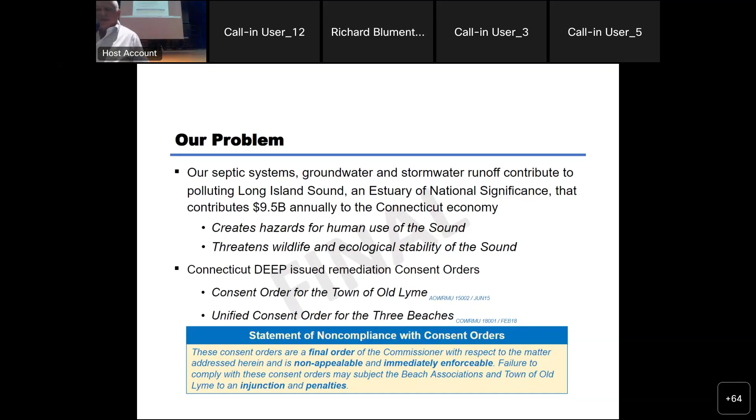Our shared objectives are to construct a solution that addresses those problems, that remediates the pollution impact to the sound and to our local properties, and to be in compliance with the consent order.

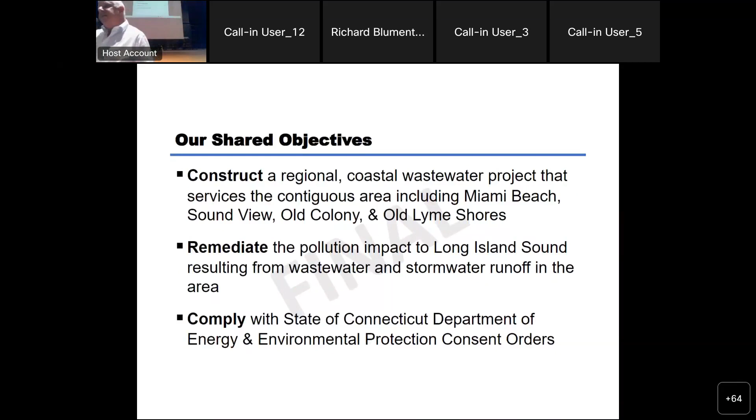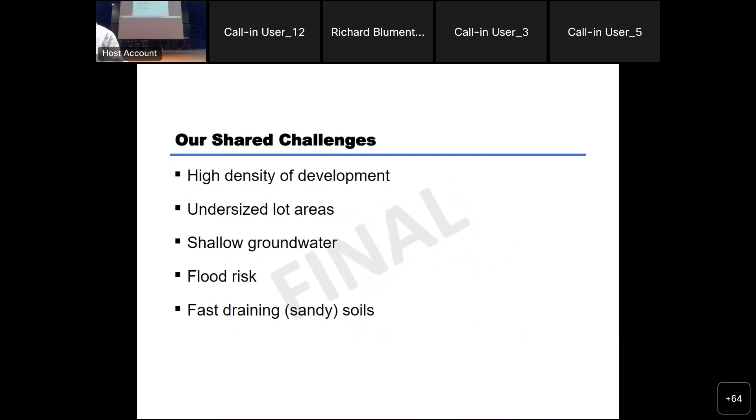Now, the challenges we face specific to meeting those requirements are: we've got a very high density of development, very small lots, shallow groundwater, fast draining sandy soils where water moves through quickly, and additional flood risk because of the elevation of the soils.

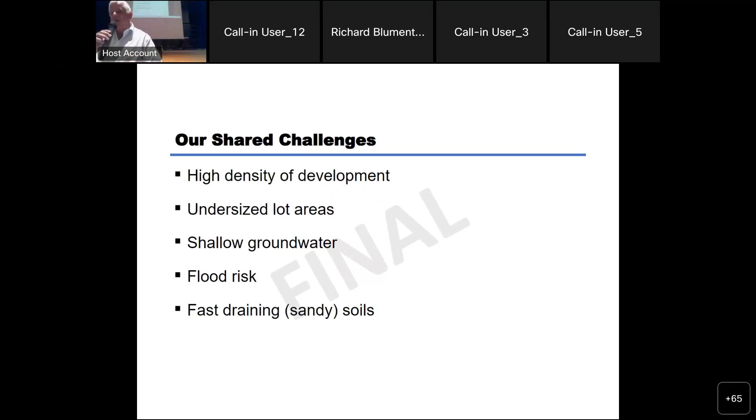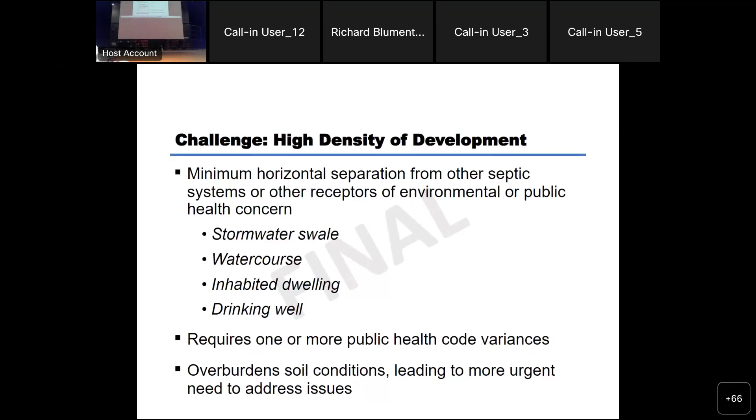So let's drill down into these a little bit more. High density of development means you get water aggregating in places. You've got people's drinking water wells next to the septic system, and water courses running off into the sound and through people's yards. All of these require public health variances, and right now most of these would not be allowable. They're only allowed because they're grandfathered in, which puts a huge burden on the sound and the properties.

With undersized lots, we have only about 2%, maybe even less, that are what we call conforming, meaning if you were starting new, you'd be denied the opportunity to build a dwelling there because you couldn't support the necessary wastewater. Even if you were borderline, it would require a custom engineered solution, which drives up the complexity and cost significantly.

Shallow groundwater: standard leaching fields are 36 to 48 inches deep, and we're looking at 22 inches in places. There just isn't any place for the water to go.

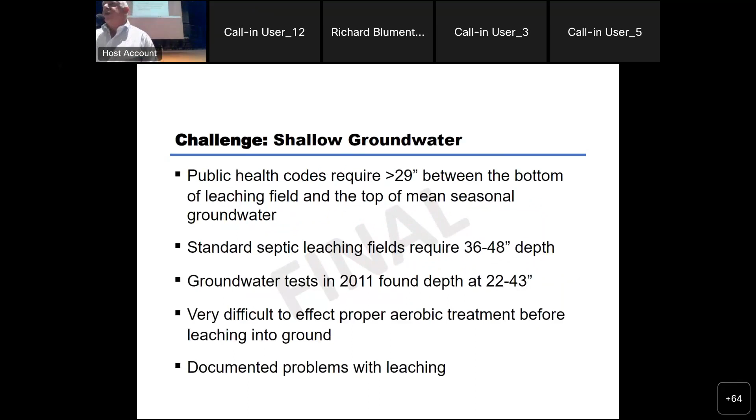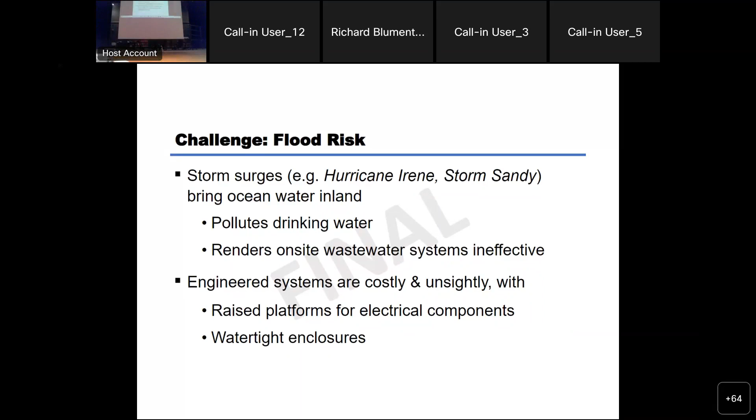The flood risk - we're all familiar with storms and their impact, but we also have just rain flooding, and sometimes flash floods that wash things through, leaving us with standing water and pools. If you have an engineered system, it's got electrical components that have to be encapsulated, which creates a whole bunch of other challenges and puts you at risk of very expensive repairs.

And again, the fast draining soils make it difficult to mitigate the polluting effect of the wastewater by having it drain naturally through the soil and break down.

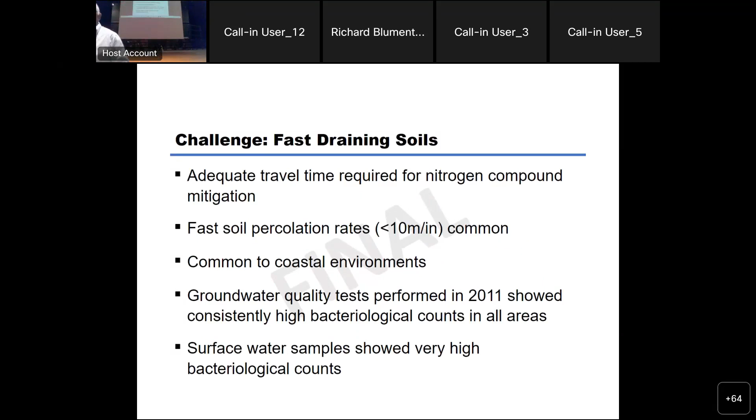So if in that timeline slide you saw the engineering studies, there are hundreds and hundreds of pages of engineering studies, and they explored 4 options. Conventional septic system upgrades, so take care of the system you've got. If it starts to fail, remediate it. If it needs to be replaced, do the replacement. A lot of that can't be done on site and requires a secondary site within the lot, or you have to move to an advanced treatment unit, which is an engineered system, more complex and requires fairly expensive maintenance relative to other solutions. Or you can move to a small community system, which was also explored, and that was the Cherrystone site, or a centralized sewer system. And so I'll talk about each of those.

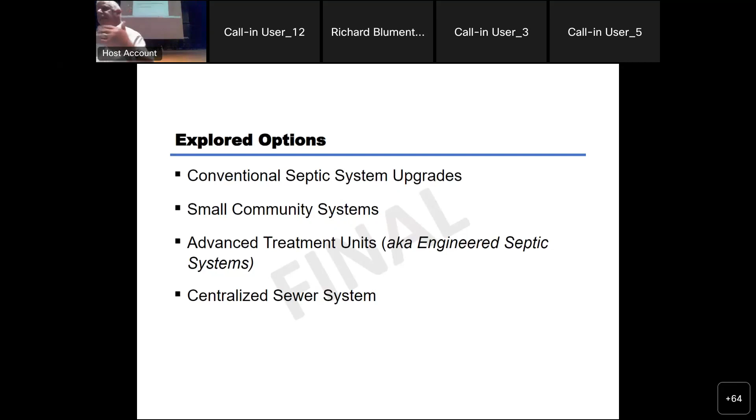So first, the upgrades to the existing systems. This was explored. A survey was done of the lots in the associations, and as I said before, these lots don't meet current codes. Because of the site conditions, it would be impossible to have compliance. Everything is too tight together and the geology just doesn't work. And all this would really do is kick the can down the road and demand another solution at another time. I think in some nearby communities, you're seeing that they've taken this path and they're having to revisit their decisions.

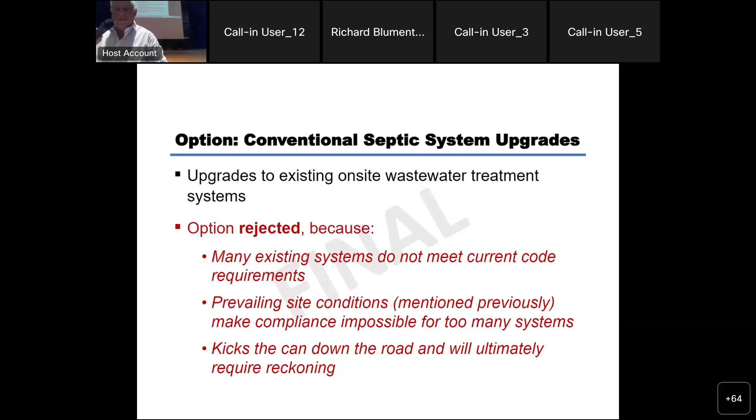The next opportunity explored was a small community system. That would be putting a smaller wastewater management system in a place like the Cherrystone's location, but it wasn't suitable because of the water supply to local homes there. There are also very high construction and operational costs associated with that, and I'll get to that a little later. So this was not a viable solution to pursue.

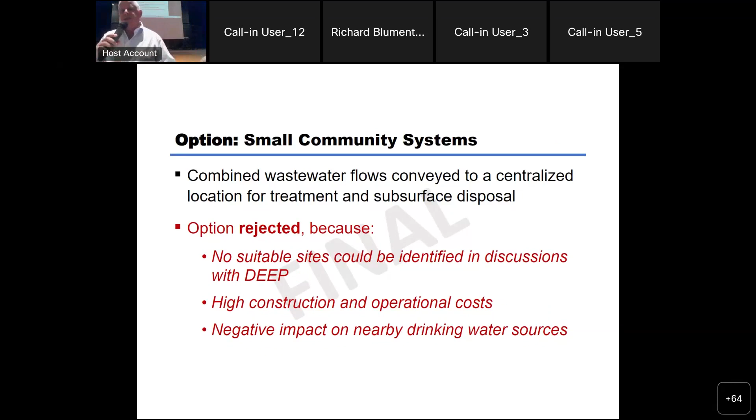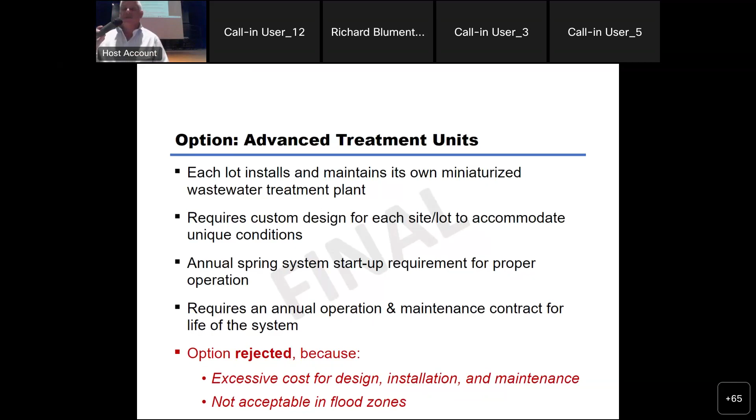And then, as I mentioned, the engineered septic systems, the advanced treatment units, are also very challenging. Depending on your lot conditions, you may have to bring in additional soil. It'll be above ground, it'll change the utility of your property, and you're going to have to make sure you go through the proper spring startup rituals. Otherwise it's not going to work, and then you're going to have to do repair on that. Each system can vary significantly. If you don't have the space to do it, it could be even more expensive than it would cost to do the sewer. So that was the last option available.

And the reason this option was selected is because it satisfies 100% of the properties. This is a solution that does work. The technology's been around for 4,000 years. We understand how to do it fairly efficiently. And it is the lowest cost to build, which may not sound like what you believe, but if you add up the individual costs to address each individual property, it's going to be significantly more expensive. And the operational costs are about 5 times cheaper on an annual basis than any of the other solutions.

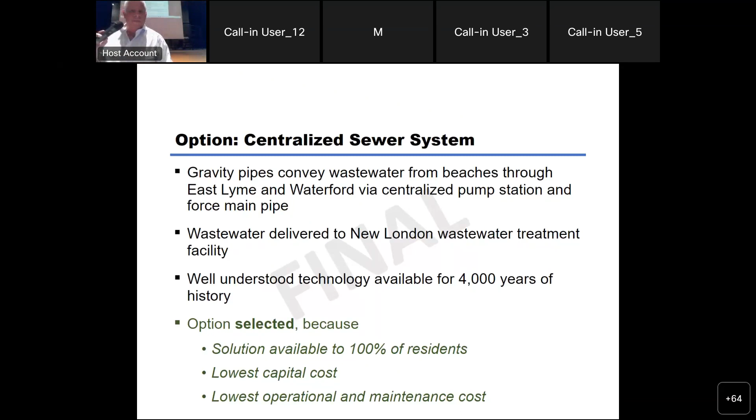So the non-sewer solutions, they're going to cost 50 to 80% more upfront. The operation and maintenance costs are going to be 5 times greater. They don't satisfy everybody's needs, and in some cases you can't even find a solution for it. And then what would you do? That puts all the burden on the individual homeowner. So as I said, there's only about 2% of the properties in the associations that are conforming and could go forward without any variances or issues, and that really isn't in the best interest of the community.

So what we want to do is create a solution that's effective, inclusive, economical, compliant, supported, reliable, maintainable, and safe. And after many, many years and many, many experts and many, many stakeholders engaged in these conversations, the majority has agreed that this should be the way forward, providing we can do it in an economically feasible manner.

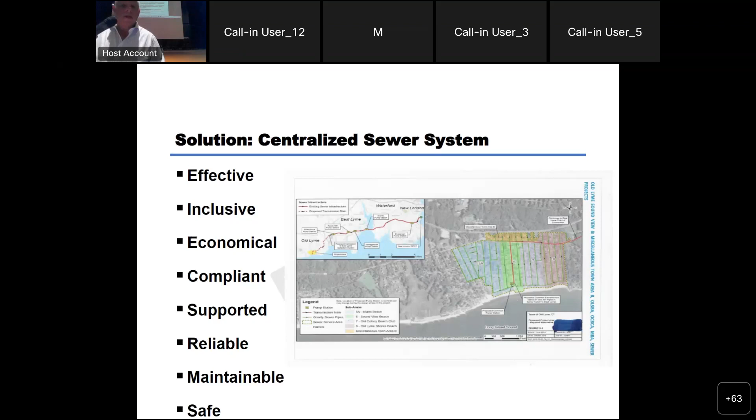One of the things that impressed me early on was our association president, Paul Roween, looked at this problem and said, we've got people adamant about needing new roadways, others with serious stormwater problems, and others with wastewater problems. Nobody wanted all of them, but he built a coalition of 85% of our association members who said, I want one of these things because it's important to me, and I'm willing to spend a little more to help my neighbor's problem too. So we agreed to do this as a unified project.

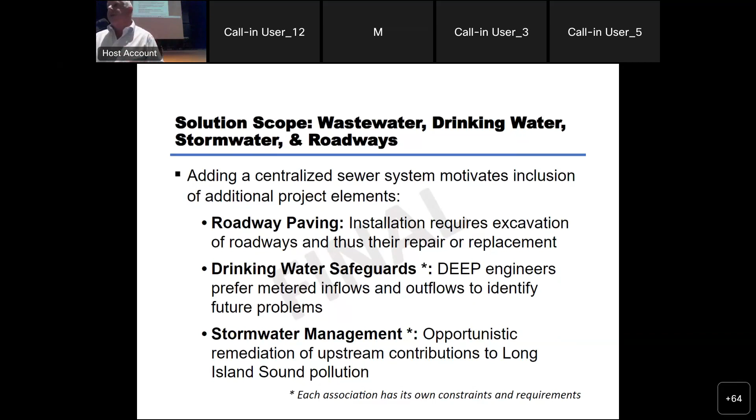Looking at the accomplishments over the last 10, 12 years, we've gotten all the intermunicipal agreements in place, and that may not seem like a lot, but politics is always very difficult. I think it's a huge accomplishment by the team involved. We've added the town of Old Lyme, which at one point was a little adversarial between the private beaches and the town.

That's not the case anymore, and that's a good thing. We've had a great working relationship with DEEP. We've been able to get them to provide immediate grant funding and long-term financing, both of which have huge financial value. So we've successfully completed the planning, contracting, and design phases. If it wasn't for the disruption of the pandemic, we probably would have broken ground already. And even with all of this, we still have fairly strong support, at least in our association, and I think that maps over to the other associations as well.

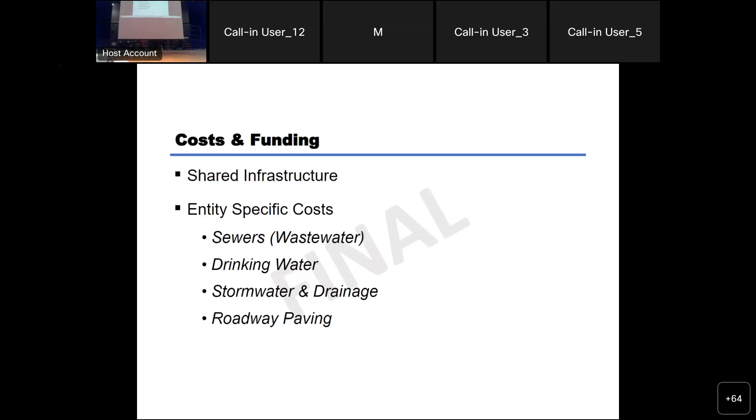So now we get to the nut we have to crack, which is how are we going to pay for this? How's it going to be funded, and what's it going to cost? Each of the entities involved has a slightly different profile for where the cost burden is, and members of each association will come talk to those numbers specifically. But as I said, it's the sewers, the stormwater, the roadway paving, and the drinking water. We've been fortunate that Connecticut Water Company actually footed the bill for putting in new water mains.

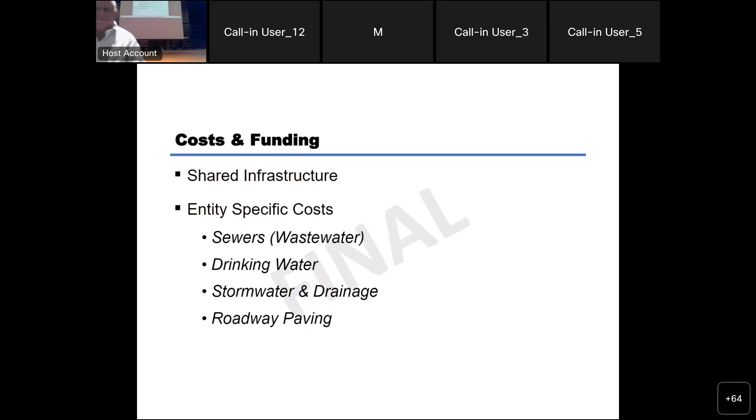Now, when we talk about cost allocations, we've got our entity-specific costs, which is in association costs or in Soundview costs for those components. And then there are shared infrastructure costs, which are the pump stations and the wastewater pipe, the main that has to run over through East Lyme to New London.

In funding sources, we've got our note from Connecticut, 20 years at 2%. For those of you in finance, you know that is worth a lot in the current 8% interest rate environment. Inflation could be running as high as 15% in some cases. So there's a real huge value to that.

And then there's the grant funding, which we've been pursuing. I spent 5 years as a DoD contractor, and it doesn't surprise me that you put in a request for funding and it gets rejected. You have to just keep going back again and again. Of course we don't want this to go on too long, but you just need to be persistent.

And then the other funding source is going to be association by association, determining how they want to cost share among the members, whether it's going to be a flat total amount divided by each EDU or property, whether there's going to be a progressive valuation, if there's anything in the bylaws that requires you to put this in as a tax so that higher value properties pay more than lower value properties, or whether some aspects of it are going to be metered and done by utilization or consumption.

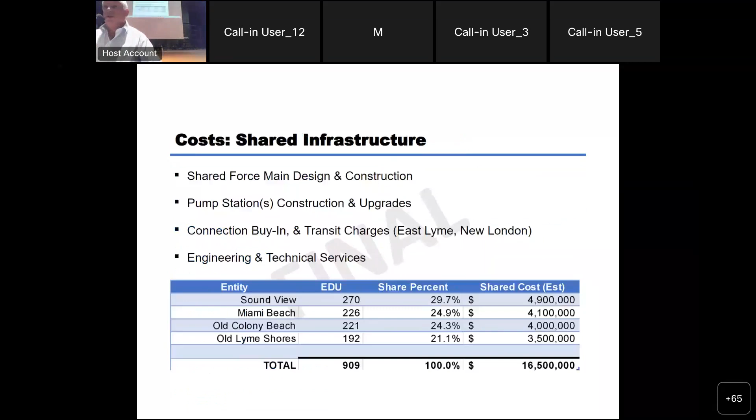I'll just say briefly where Miami Beach is at. We have, unfortunately, a large community, a lot more roads to cover, more mileage, more pipes, more tar to be put down or dug up. So our numbers are going to be significantly higher than the other associations in town. The cost to put in a sewer system in Miami Beach, I'll just read the number, is a little over $16 million. That includes the shared infrastructure.

If you just look at Miami Beach Association's internal structure, it's just a little bit over $13 million. If we add in stormwater, which we've all talked about, that's adding another 10 to 15%, or $2 million. So the overall package is a rather high package.

But again, I wanted to emphasize Miami Beach's situation is different than the other associations, with poor soils and a shallow area, so it's pretty flat. It's very hard for us to get to where we need to be for the gravity system, so that's significantly increasing the cost for Miami Beach Association.

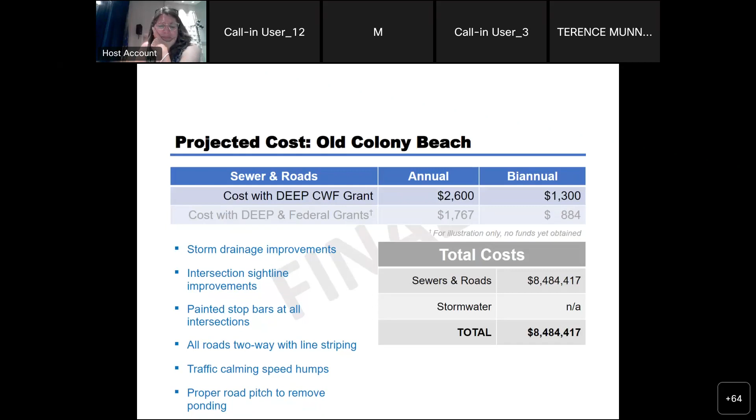So, not to dwell on it, but the cost drivers do vary significantly between the associations. In Old Lyme Shores, probably 25% or more of the area is severely impacted by significant ledge. We verified that when Connecticut Water was doing the water installation, and they encountered significant difficulty getting trenches open and pipes in the ground. Old Lyme Shores, like some of the associations, hasn't taken on a major infrastructure improvement program in decades, and our roads really show it. They really need a lot of work.

We also have to improve stormwater management on our properties. That, again, as John pointed out, may not affect all of our residents, but surely affects somewhere upward of 30%, and also contributes to fast-running water runoff directly to the Sound. So we have a way to mitigate and improve that overall flow.

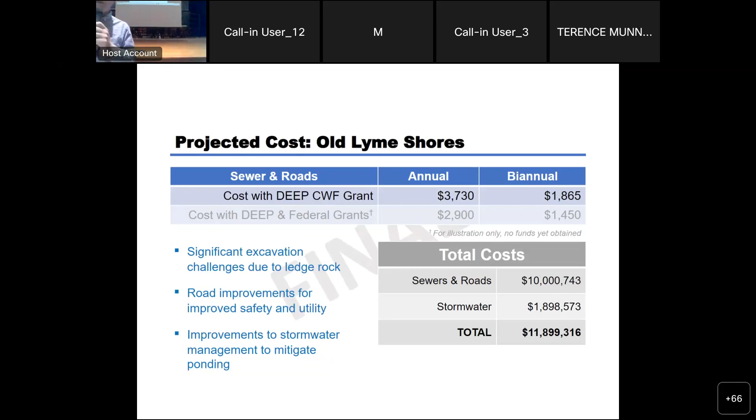Okay, I'm Rich Prendergast, chairman of the WPCA Commission for the Town of Old Lyme. We're coordinating with the Old Lyme Private Beach Association. And as was said earlier, it's sometimes contentious - it was, and I'm glad we've gotten to the place where we can share resources and lower the cost for everyone. This presentation for the Soundview part, you can see here on the right, you have the sewer parts.

So that's a 7% increase from what we thought this was going to be in 2019. It used up all our contingencies, all our extras, used up everything. The cost when you take out the state's existing 25% grant funding is around $8 million. We thought it would be $7.44 million in 2019 or earlier. This includes shared costs, the internals, which is the Soundview houses and the streets.

It also includes the intermunicipal agreements. From there, we're patching the roads that are included in it, and since those are public roads, the town will repave those roads—that's excluded from this cost. Drinking water has already been handled, and the stormwater is a separate funding, a separate project.

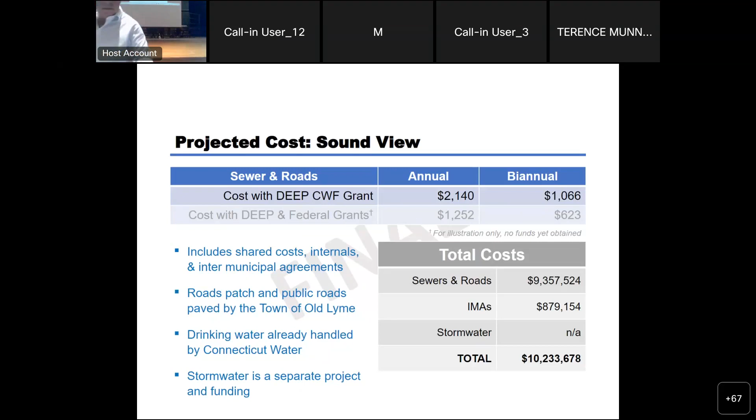Right, so as Rich said, there are additional costs, and I think this is where it gets even more real for each individual person involved in the project—that's the connection costs you're going to have for water and for sewer. We don't have numbers on this slide because that can vary significantly based on your geology, your location, and your requirements.

So our advice is to discuss those particular cost issues with your individual WPCA board members and save that for outside of this presentation, because they would be more familiar with it and able to give you better quality answers.

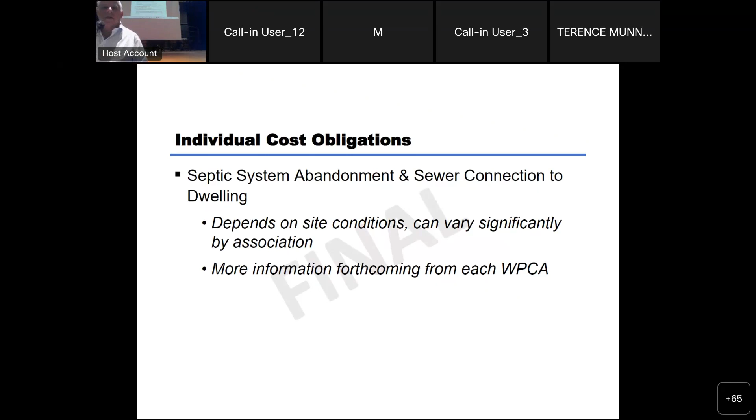The late-breaking news, as mentioned before, is that we had applied for senatorial funding, Senate appropriations, and that had not come through. It's common to need to go through many iterations.

But our existing agreements with the state of Connecticut and with the different municipalities have drop dates on them. So we're going to have to exert some pressure on the funding sources and say, we understand you may have other people who've been asking longer than us, but we're here and we're going to run out of opportunities to do this, and we would like your support. If not, we may have to suspend this—that's a very real possibility, and we're prepared for that as well.

So with that in mind, our next steps are to look at our interim funding obligations, which are due at the end of January. As previously envisioned, we had financing agreements with the state of Connecticut so we were spending money on the design phase and other work that had to be done before shovels went in the ground, and they paid for that for us and underwrote it.

If we don't start construction by a certain date, then we have to start paying that money back. Financing terms are favorable, which is a good thing, but obviously we would like to roll that into the future and not incur that cost now.